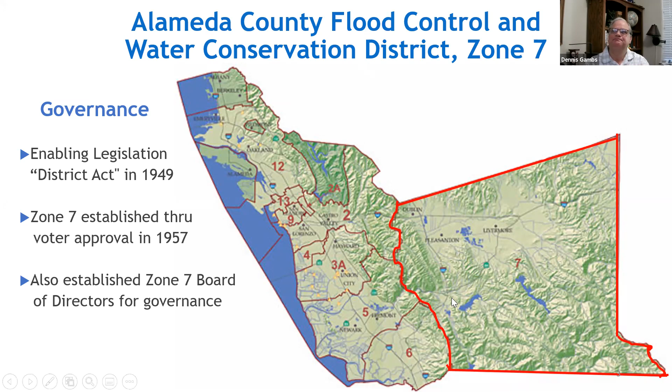So why were we formed? Well, a big reason was the need for new water. The groundwater basin was in overdraft, in fact approaching historic lows. Then there was limited supply for new growth and agriculture. At the same time, the state water project was being formed, and Zone 7 entered into contract with the California Department of Water Resources in 1961.

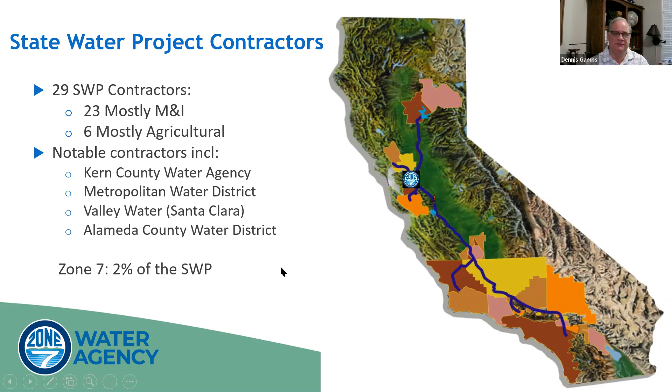A little closer to home, you've got Zone 7 with the Alameda County Water District and the Santa Clara Valley Water District - they're all what we call our South Bay Aqueduct partners. I just want to point out you've got a number of water agencies in Northern California, including these North Bay and these counties near Folsom, near Oroville. Another frame of reference is that Zone 7 is 2% of the state water project.

Now I want to just go over the system. Zone 7's allocation is known as Table A, and the system delivers that, and we also can use it for transfers.

But just to go over the facilities, the mother facility, so to speak, is Oroville Reservoir. It's on the Feather River. That collects our water, and really our water rights, because the water goes down the Sacramento River derived from that water there, but it gets commingled with other waters and certainly the Delta. Then the main feature, I guess, is also the California Aqueduct that delivers water from the Delta. It feeds the South Bay Aqueduct in Zone 7, and then it goes down to Southern California.

Oroville Reservoir covered. South Bay, Lake Del Valle is off the South Bay Aqueduct.

It's part of the South Bay Aqueduct system, feeding water there in summer to meet peak demands. San Luis Reservoir is another place Zone 7 can store water it doesn't need that year, to use later. Another feature this map shows is our groundwater banks in Kern County, not really part of the State Water Project system. We store water there but get it back through a credit or exchange - the state delivers water to us, and that water doesn't then go to the agencies we get it from down there. So it's just an exchange.

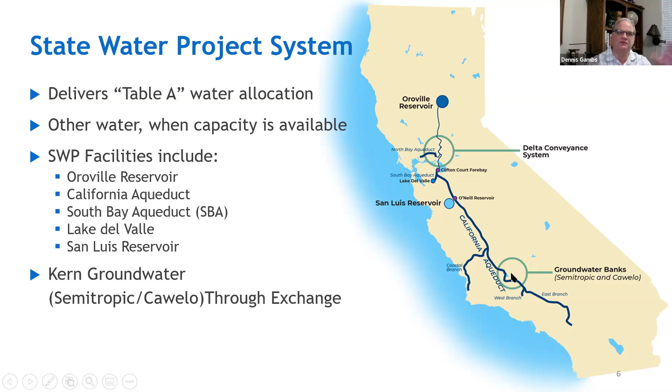So what are our water supply sources? 70% is imported from the State Water Project via the Delta. In any given year we may be storing water - we're not really storing water this year, I don't believe. In years that are wet or even normal, we sometimes store water in our local groundwater basin, San Luis Reservoir, and the Kern County groundwater banks.

Another piece of our water sources puzzle is local supplies - not quite a third, but Arroyo Valle water rights, about 10%. The groundwater yield from the main basin, which in essence belongs to the retailers who pump it. And then from the retailers, or at least the cities of Pleasanton, Livermore, Dublin, and San Ramon, there's recycled irrigation water.

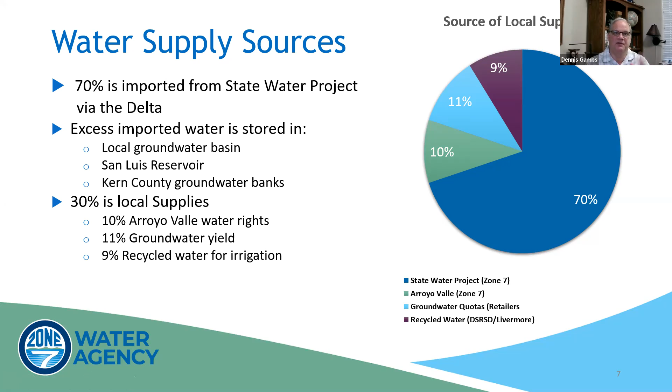We have four main retailers: Cal Water Service and City of Livermore, both serving Livermore, roughly about the same size. City of Pleasanton is the largest retailer, and then Dublin San Ramon Services District, which serves Dublin and the Dougherty Valley area of San Ramon.

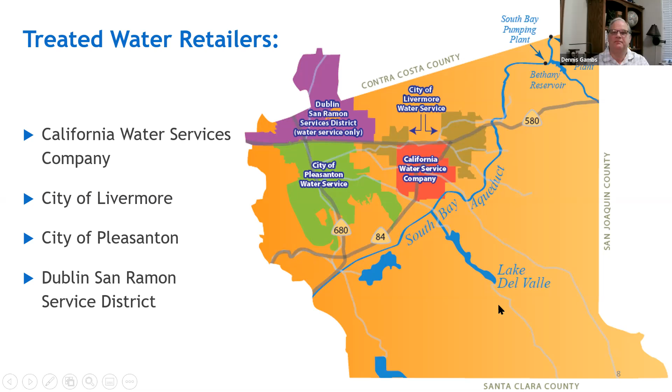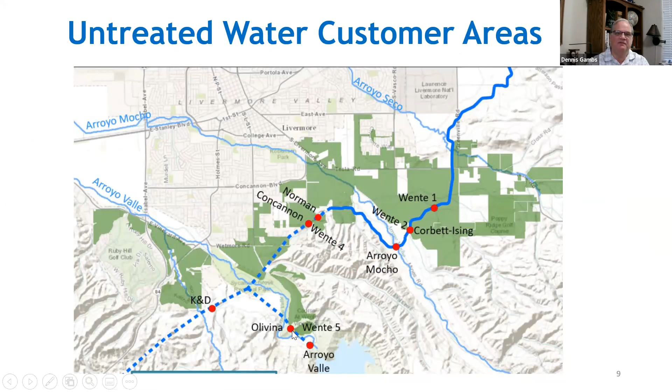And then untreated water customers, about 10% of our deliveries. The green area represents mostly vineyards - that's the property irrigated. The largest customer is Wente. And if Charles is not asleep, I'd point out Olivina, so we do have olive trees there.

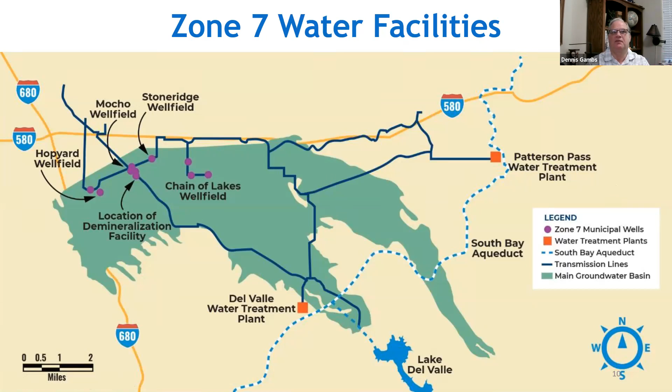So Zone 7 facilities: off of the South Bay Aqueduct we have a couple of treatment plants to feed the transmission system. Off of the transmission system there are connections to the retailer systems. And then we have wells that also fill the pipeline from groundwater stored in the groundwater basin.

So what are our challenges? We have decreasing State Water Project deliveries, and climate change or global warming, which will lead to extreme hydrology - causing higher Delta water levels, resulting in salt water intrusion, and less snowpack storage. A lot of the storage you have, you're losing because you'll get precipitation as water instead, so you have to capture it to make up for the loss of snowpack and other facilities. There's also increased variability of seasonal weather and storm intensities. The modeling is pretty confident this will happen, but until it plays out, you don't know quite how extreme those storms might be.

Another concern is Delta levee failures - it's kind of a ticking time bomb. Some of those levees were built in the 1800s, so they're susceptible to failure, especially from seismic events. And then we'll have a new customer base over the next build-out that will need new water.

Talking about the decreasing State Water Project yield, our Table A amount is 80.6 thousand acre feet - sorry for the abbreviations, but that's 1,000 acre feet. Over time that yield has been lowered. It's said to be for environmental regulations, to meet environmental needs, or put another way, court decisions and lawsuits. But in any case, what's real is the facilities built to distribute water are not going to be able to deliver the full entitlement from our Table A.

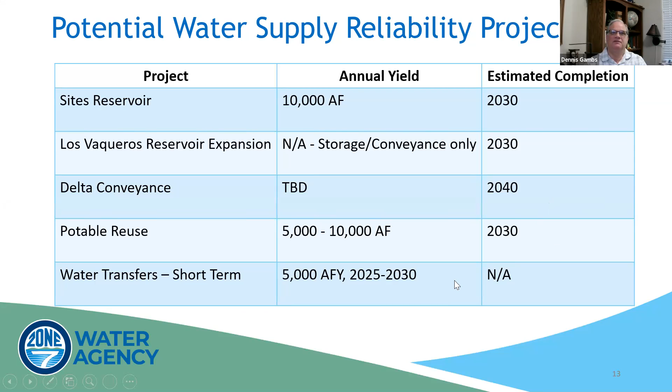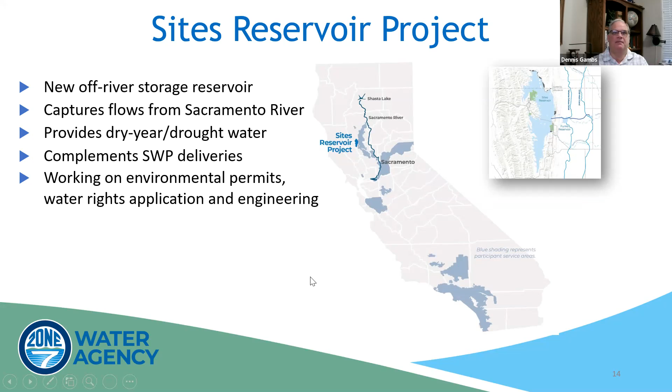So Sites Reservoir is new off-river storage, captures flows from the Sacramento River. The water would go from the Sacramento River over to the reservoir that would be built. This is designed to deliver dry year and drought year water, so it's meant to complement the State Water Project. It has support from the state, and grant funding in addition to what the members would have to pay. We're currently working on environmental permits, water rights applications, and doing some engineering.

Los Vaqueros Reservoir, located between Livermore and Brentwood—it's existing, of course, and it would raise the level of the existing dam. It provides increased storage, which would be allocated to the customers, and then it would install new conveyance facilities at the Delta and the State Water Project. Hopefully we get better water when we use that, because it's designed, with all the connections to the Delta, to get wet weather flows.

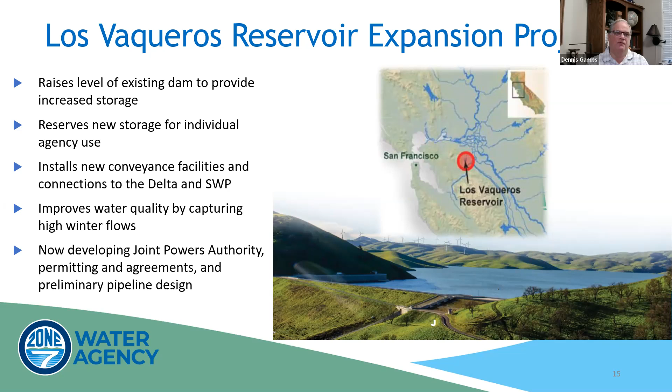They're currently developing a joint powers authority. This facility is owned now by the Contra Costa Water District. The plan is that a JPA of the members would then, in the future, govern the reservoir. They're working on permits and preliminary design.

So the Delta Conveyance Project—that's a single tunnel that would be under the Delta. It would connect up at the Sacramento River, go into the Delta. They're studying a couple of alignments, and then connect to the California Aqueduct. The stated purpose from the Department of Water Resources is to restore and protect the reliability of State Water Project water deliveries, and address sea level rise due to climate change. You could take water that's maybe 15 feet higher, I've heard, and get it to the State Water Project system.

Because you'd have the water in tunnels, Delta levee failures would not affect our deliveries. It provides operational flexibility, and it's said to improve aquatic conditions. What I'm hoping is that it would also do all it could to help protect the Delta ecosystem. This project is currently undergoing CEQA project development. At this point, we're not sure if the plan is just to keep or maintain our 60% of our Table A, or if we get any more water out of it. So there are some unanswered questions currently with this project.

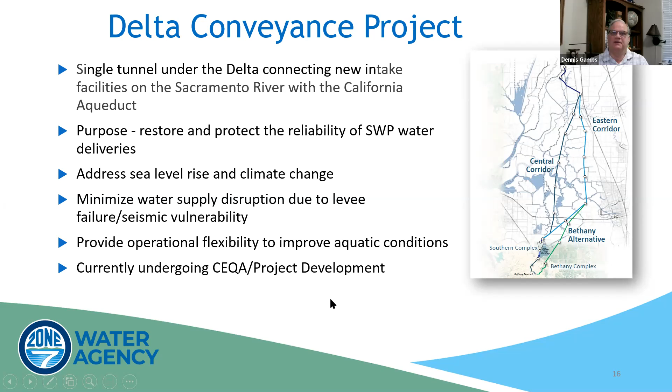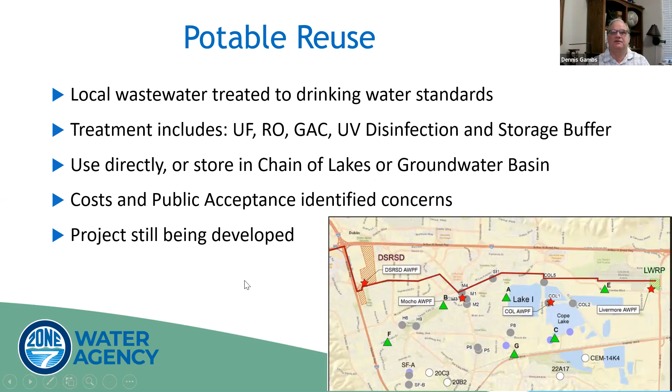The last project is potable reuse—local wastewater treated to drinking water standards. The effluent from the treated wastewater would go through some process. I've put all these acronyms here that just roll off everybody's tongue, but there will be no test at the end of this: ultrafiltration, RO (reverse osmosis), granular activated carbon, and then disinfection with ultraviolet, and storage buffers to make sure the water meets those standards before it would be used directly—or what I'd prefer in this project is storing it in the chain of lakes or the groundwater basin as another buffer. Cost and public acceptance are identified concerns still, and this project is still under development.

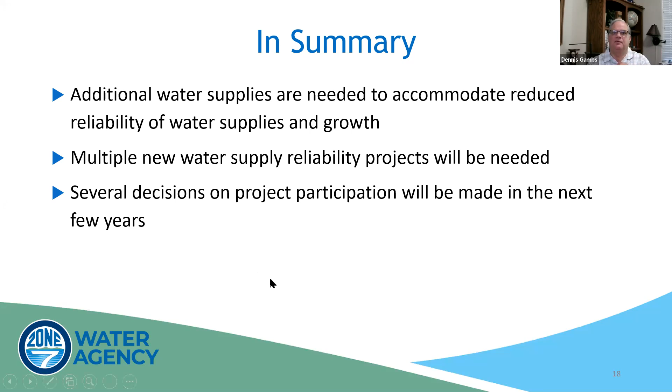In summary, we're going to need additional water supplies to accommodate the reduced reliability of water supplies, and growth. Those projects are intended to meet the challenges we have, so we've got multiple projects to do that. Over the next few years, there will be several decision points on the projects, primarily approval of phases of the projects where Zone 7 has to commit to payments. I'll certainly keep this group apprised at those times and meetings when Zone 7 has to make those decisions.

Switching to this year, as you know, it's a dry year, classified as a critically dry year, following the dry year from last year. So our allocations are only 5% of our table A. Zone 7 has requested voluntary reductions in water usage, and Zone 7 is purchasing water supplies or water transfers to meet this year's and possibly next year's demands. But the demands are also going to be supplied from storage in the local groundwater basin, pumping wells, and Kern County groundwater bank through exchanges.

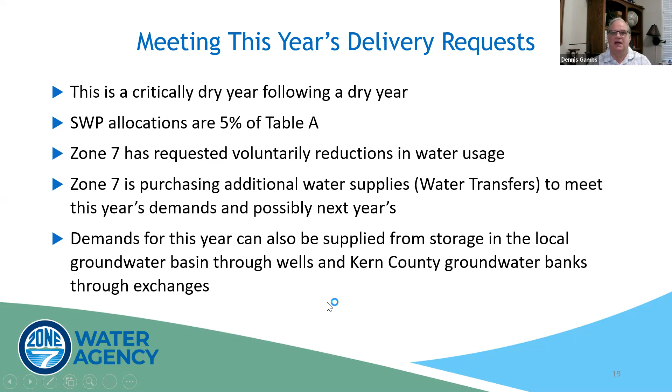And so I would be happy to answer any questions. I'm trying to stop share. I have been...

This is the first time I've got to see you guys since that presentation. That is a terrible experience, just talking to a screen and not seeing anybody. So I'm going to be glad when we can get out of the Zoom world.

I would, with that, put my contact information in chat, because really what I want to do is get any feedback from you guys. That's my role as a board member. But I think there's time for a question or two, right, Don?

We have some hands that are raised here. I'm not sure who's first, but Bob Woerner, Mayor Woerner. Oh, I'll let John go first, he's the expert here. John Marchand. Okay, surprise, this is my life.

You mentioned the loss of 12.9 thousand acre feet in conveyance capacity in 1998. I think it's very important that everybody understands what happened, because I got a lot of complaints about the cost of development fees for new development. Zone 7 ultimately spent about $200 million enlarging the capacity for the South Bay Aqueduct. As you pointed out, Lake Del Valle was created so we had capacity for peaking during the summertime. Well, then the temporary facilities, recreational facilities that were put into Lake Del Valle, caused Zone 7 to lose that 12.9 thousand acre feet of capacity in Lake Del Valle.